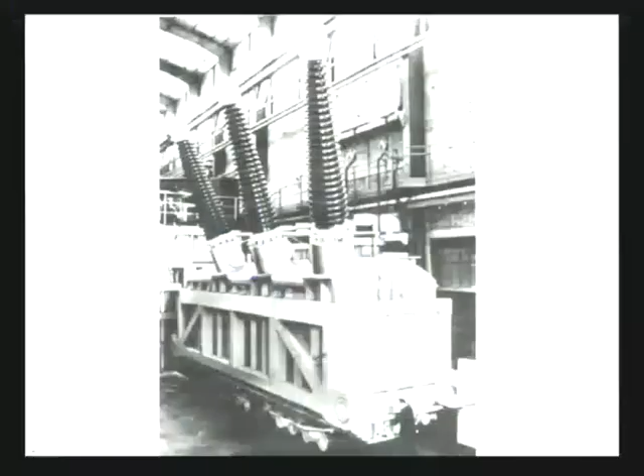One is shown in this diagram. From outside, it looks like a box or a tank fitted with a large number of accessories. In this lecture, we will see how the main parts of the transformer are constructed, their purpose, as well as the construction and purpose of these accessories.

So if we look at a cutout view of a transformer, we find that inside the tank, we find the core of the transformer, the windings, the terminals, and there is an overhead conservator like this.

The essential part of the transformer consists of a core with windings on the limbs. In the last lecture, we have seen that a three-phase transformer built as a single unit can be made up of three limbs. The return limb for the flux is not necessary, since the sum of the fluxes is zero. However, this three limb construction does offer a slight imbalance to the flux path.

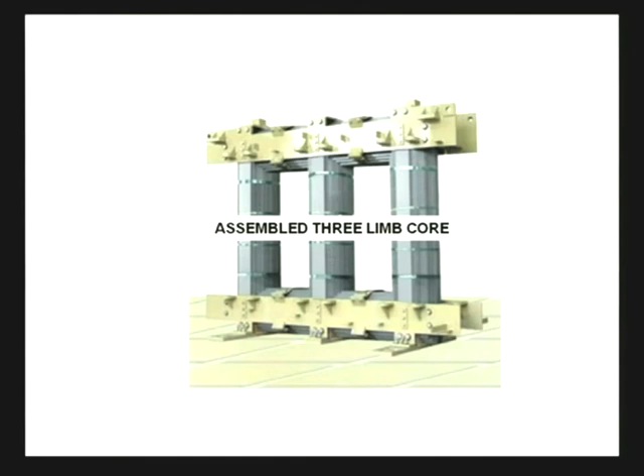So, here is a look at the assembled three limb core. There are several parts to it. These vertical parts are called the core, the horizontal one is called the yoke. As in the case of a single phase transformer, these are not solid iron bars. However, they are made up of thin steel laminations. The purpose of the core is similar to that of a single phase transformer, that is, to provide a low reluctance path for the flux as well as to support the winding and provide mechanical strength.

Since the flux flows along this direction, the transformer cores are laminated in this way. These cores are made up of long strips of thin steel plate, the material being either hot rolled or cold rolled grain oriented steel. For large transformers, it is usually cold rolled.

Since these are made up of steel laminations, it is necessary to bolt them down with clamps. These are the clamping pieces of the core.

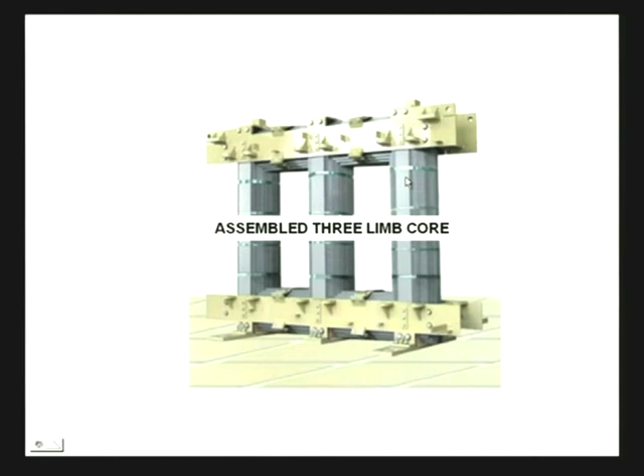If I look at a top view of one of the cores along with the winding, it will look somewhat like this. This part is the actual core cross section, on which there is an insulating bobbin cylinder, made up of pressboard or SRBP cylinder. On the cylinder, first the LV winding will be placed, then there will be a gap between the LV winding and the HV winding. There will be a second cylinder on which the HV winding will be placed, and there will be a gap between HV and LV winding through which cooling fluid may be circulated.

One interesting thing about the core structure is that it is not square. The reason is simple: in order to support a certain amount of voltage and not to exceed a given flux density, the core cross section must have some minimum area, and it is well known that for a given area, a circle has the minimum circumference.

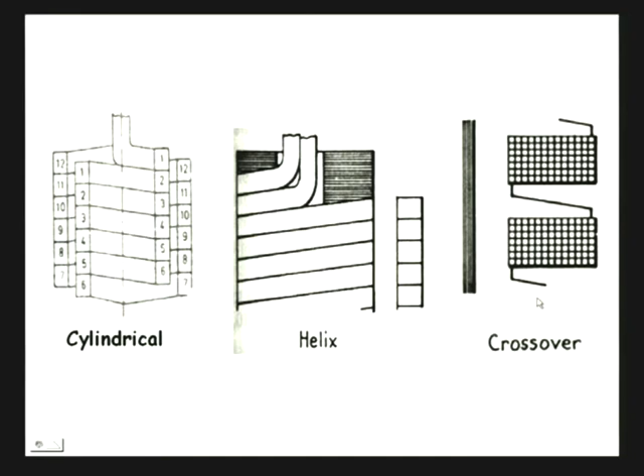This figure shows some of the common winding configurations. The first one is cylindrical, the second is called the helix, and the third is called the crossover. These are normally used for low voltage winding, while the crossover is used for high voltage winding with many turns.

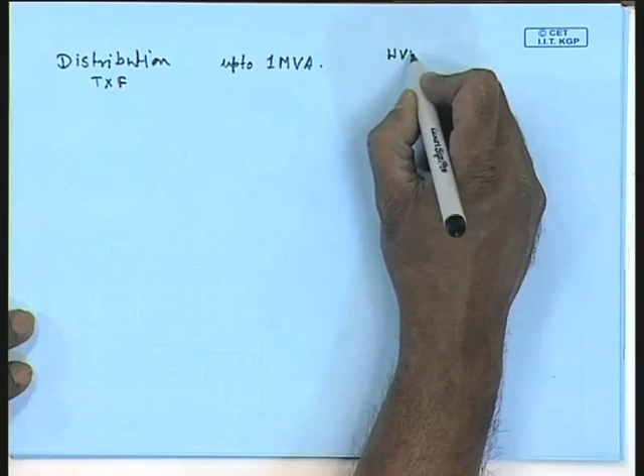Now, depending on the application, MVA rating and KVA rating of the transformer in question, different windings are used. For example, if it is a distribution transformer of MVA rating up to 1 MVA, the HV voltage rating is 11 kV to 33 kV. The HV winding will normally be either crossover or multi-layer helix.

Similarly, the LV winding for a distribution transformer will usually be rated at 440 volts. The choice of winding for this is helix, which is shown here. This is on the lower spectrum.

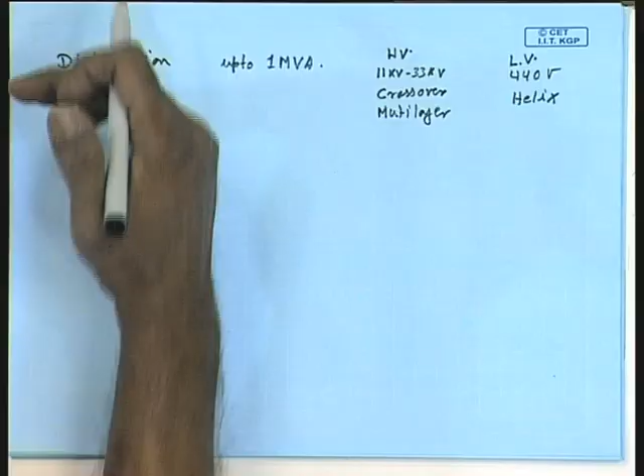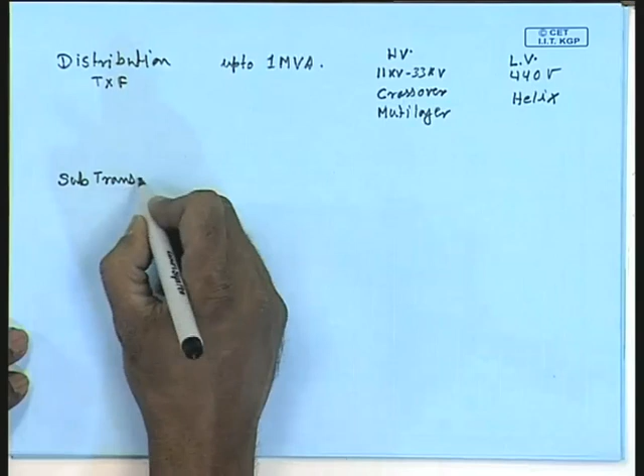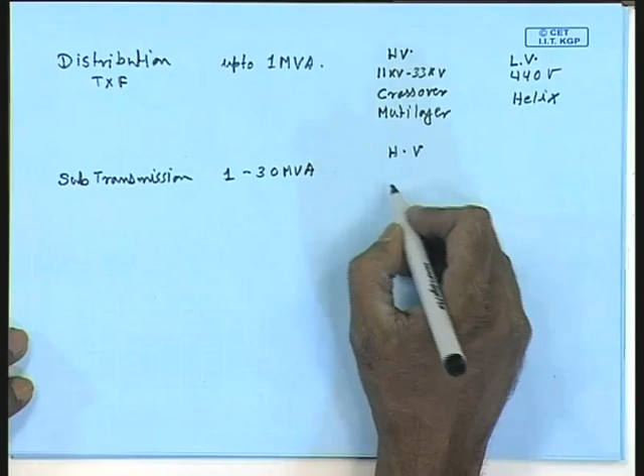Let us see something at the medium spectrum, which is the subtransmission level. This is, let us say, from 1 to 30 MVA. The HV voltage will be in the range of 33 to 66 kV. The preferred HV winding type for this is disc. The LV voltage for this type of transformer will usually be 11 kV, and for this LV winding usually disc or helix winding will be used.

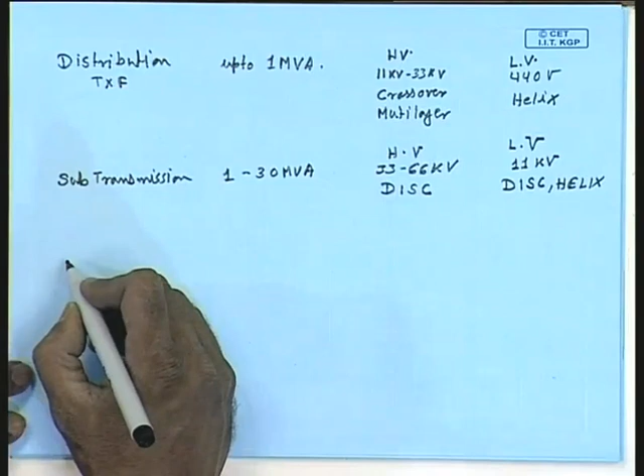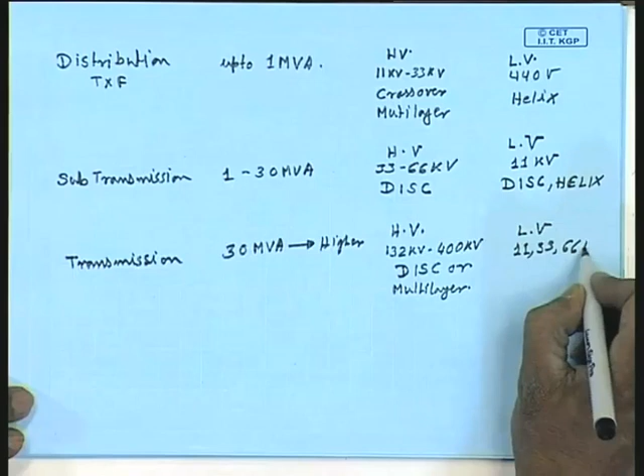Going further higher up in the MVA rating, transmission transformers will be 30 MVA and upwards. The HV voltage will be in the range of 132 kV to 400 kV. The preferred choice is disc or multi-layer. The LV voltage can be 11 kV, 33 kV or 66 kV, using disc or disc helix, multi-layer helix, disc, or disc helix windings.

Coming to generator transformers, this is also 30 MVA or upwards. The HV side is again 132 kV to 400 kV, and the choice is disc or multi-layer. The LV voltage, which is the voltage generated by the generator, will be in the range of 11 to 22 kV, and the choice of winding is disc helix.

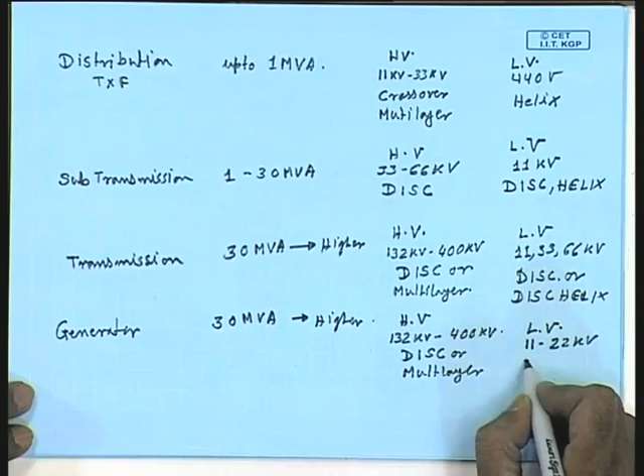So this is a rule of thumb, but depending on the special application, a particular type of winding is chosen.

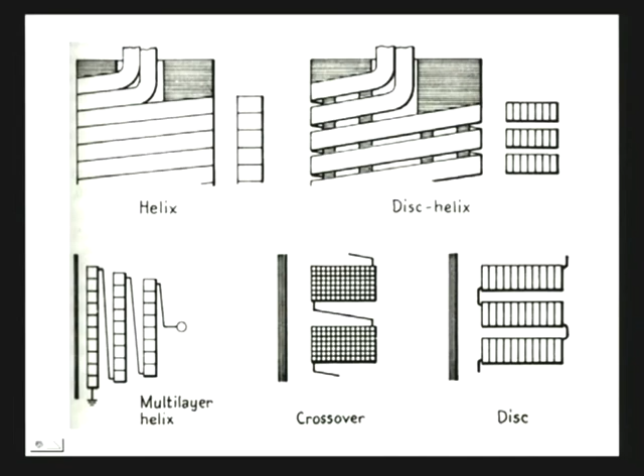This is necessary so that the cooling medium, that is the cooling oil, can flow in an uninterrupted manner, carrying the heat generated by the I squared R loss in the windings to the outside cooling medium.

Another interesting feature of a 3-phase transformer, which is normally not found on single phase transformers, is the arrangement of tapping.

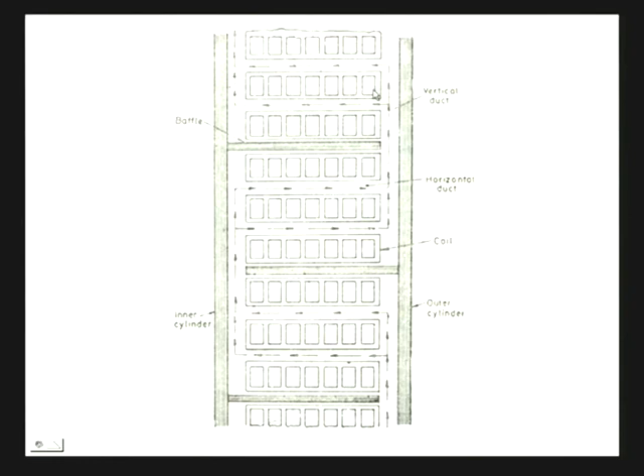We have mentioned in one of these slides that it is necessary to circulate cooling fluid through the windings and the core of the transformer in order to prevent the temperature of the transformer rising to a very high level.

Now there are different methods of cooling. For small dry type transformers, it is usually not necessary to use any separate cooling medium. The transformer is left outside, and the ambient air is sufficient to cool the transformer. This is called air natural cooling, or AN.

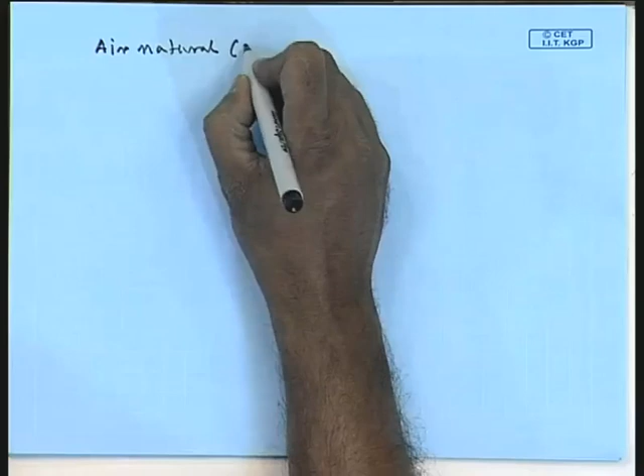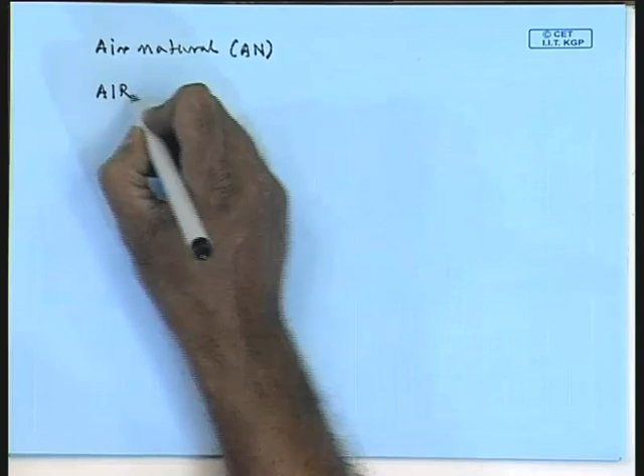On a slightly higher rated transformer, natural air circulation may not be sufficient to prevent temperature rise, in which case the transformer may be cooled using a fan. This is called air blast cooling. Except for very special applications where using a cooling medium is hazardous, these are used only for small rated transformers.

The reason for using oil is that it is a better conductor of heat than air, and it has a higher coefficient of volume expansion with temperature. Therefore, sufficient circulation is easily obtained on account of the natural thermal head that occurs in the transformer because of heat produced by different mechanisms of loss such as core loss and copper loss. So the natural cooling by oil works this way.

As the oil heats up, it becomes lighter, moves upward, and comes in contact with the transformer tank wall, through which this heat is dissipated to the ambient. This is called oil natural cooling.

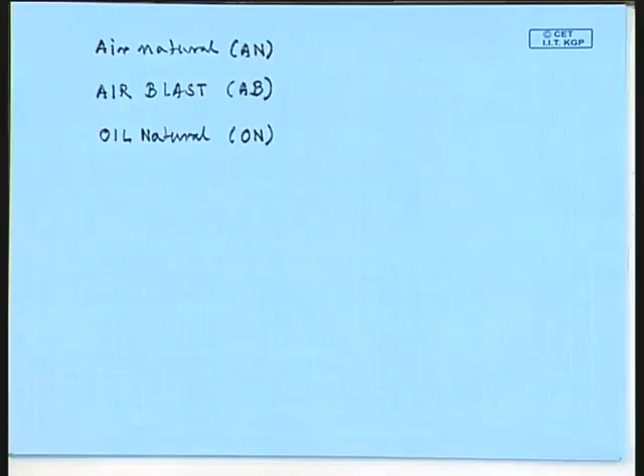Now, for smaller rated transformers, a simple transformer tank is sufficient to provide this cooling.

However, for larger transformers, the surface area provided by the tank alone is not sufficient, and therefore the tank's area is usually supplemented. Either the tank surface is corrugated to increase its surface area, or more commonly, circular or elliptical tubes are placed all around the transformer tank in order to increase the cooling area.

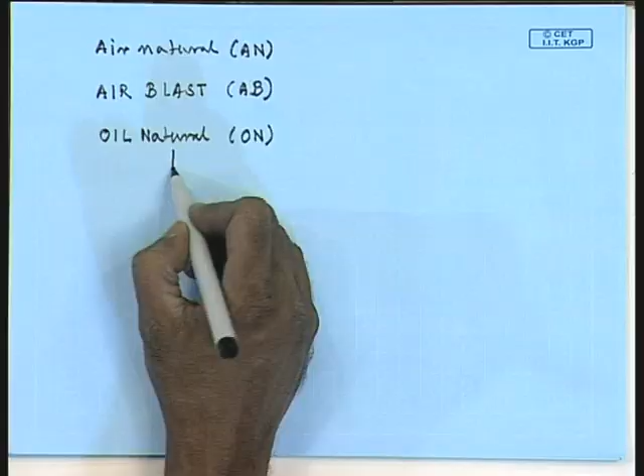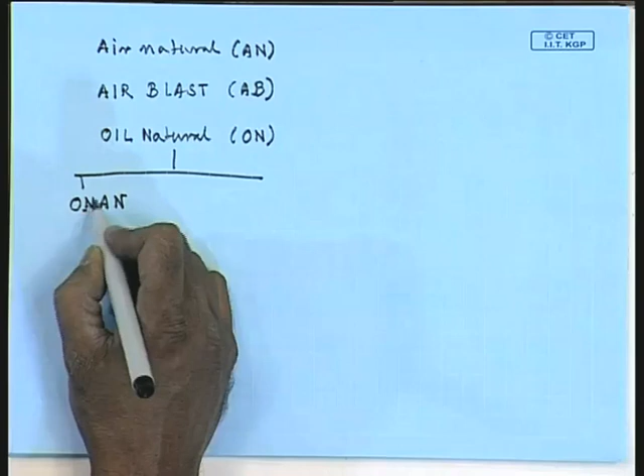There are several categories. This is called oil natural, air natural, because neither the oil nor the air is forced through any pump or any other device.

However, for larger transformers, natural cooling by air is not sufficient, in which case it becomes necessary to blow air to cool the heated oil.

For this, normally the hot transformer oil is carried to an external heat exchanger through a piping arrangement, and in the heat exchanger, heat is transferred from the oil to surrounding air, usually cooled using a fan. This method is called oil natural, air forced.

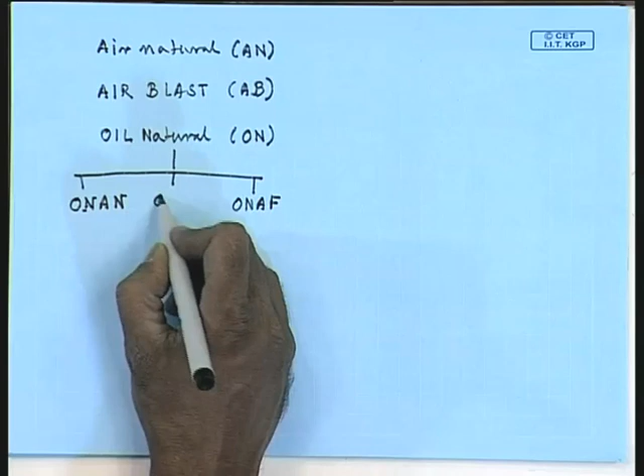This heat exchanger can also be cooled by forcing water to circulate around the oil carrying pipes, in which case it is called oil natural, water forced. This is used normally in hydroelectric generating stations for the generator transformer, because a large quantity of water at a sufficient head is available, and water is a better medium of cooling than air.

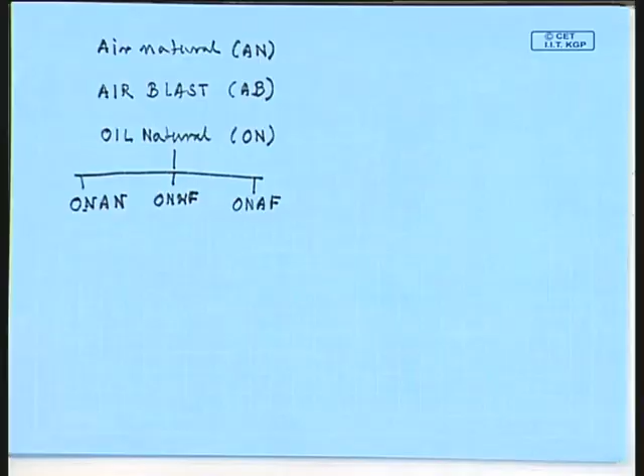For even larger transformers, the normal thermal head of the transformer is not sufficient to provide enough cooling. Therefore, the oil is circulated through the transformer using an oil pump. The rest can be similar to oil natural, air forced. This oil pump circulates the cooling oil through the transformer at a given flow rate in order to remove the heat generated from the transformer faster.

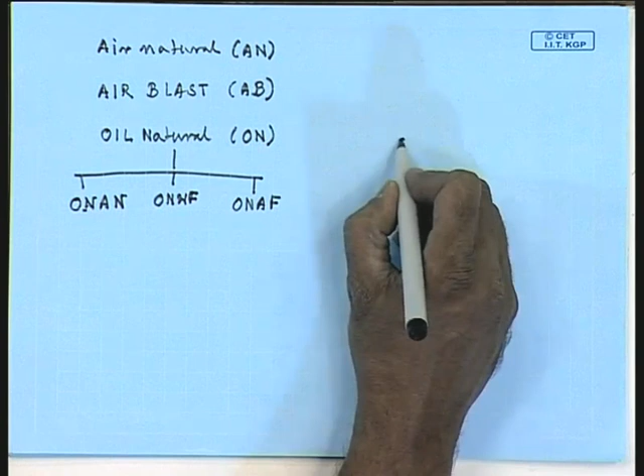So this is called the oil forced cooling method. It is usually used with a heat exchanger which is cooled by a fan, so the complete scheme is known as oil forced, air forced. Such a scheme is shown in this diagram.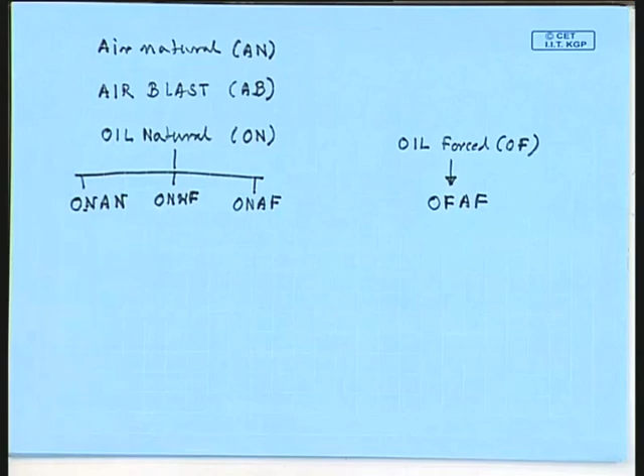It is interesting to note that this scheme can operate in variable mode. For example, the oil pump and the fan need not be on all the time. If the transformer is lightly loaded and dissipating less heat, then both the oil pump and the fan may be turned off, and the scheme can work in an oil natural, air natural cooling method.

If the load increases to some extent, the fan may be turned on first, so it will work as an oil natural, air forced method. It is only at near rated load or at rated load that it will work as an oil forced, air forced cooling method. This way, the power consumption for cooling comes down and the overall efficiency of the transformer increases.

The next important constructional feature of a transformer is its bushings. These bushings are meant for making connection to the transformer from overhead lines. It has to be ensured that the transformer tank is normally earthed, so when making a high voltage connection through the tank to the transformer winding, it has to be ensured that there is no flashing, short circuit, or degradation of insulation between the high voltage terminal and the earthed transformer tank. This is done through a special bushing.

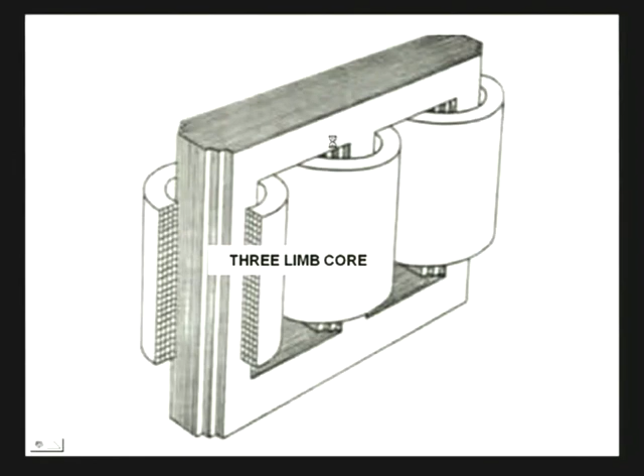The transformers are also to be provided with sufficient protections. The electrical protections are normally provided by relays. Here is one arrangement that provides protection against transformer overcurrent or short circuit. This is provided by what is called the Buchholz relay.

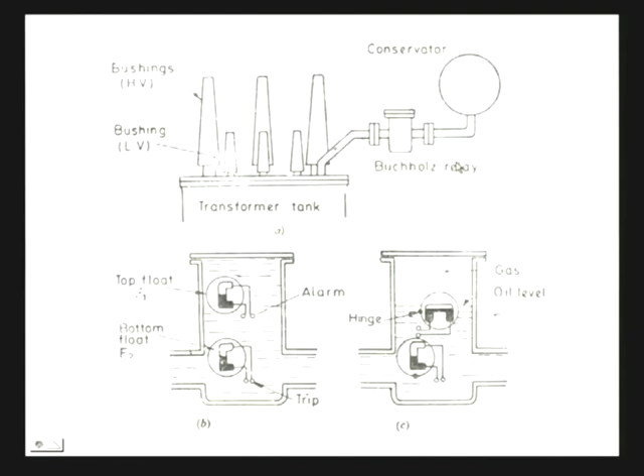The conservator provides a space for expansion of the oil. As the transformer heats up, the oil expands and flows through the tube to the conservator. Now, this conservator, although it is not shown here, is connected to the external atmosphere through what is called a breather. So, this is the conservator.

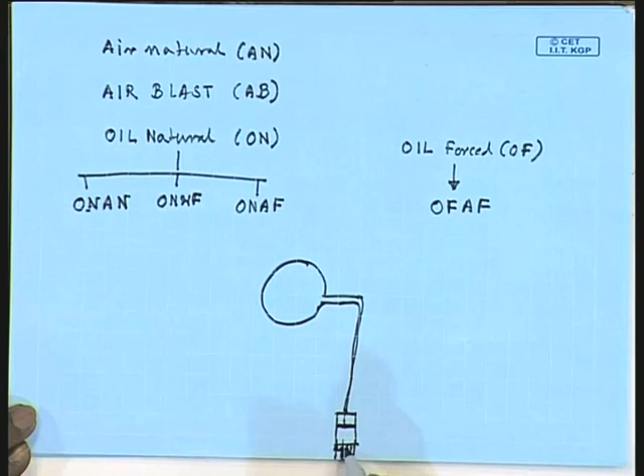The conservator will normally have a pipe extending down, this is called the breather, and at the breather end there will be a cylinder like this. This cylinder will contain silica gel, so that the air that comes in or out of the transformer is always passed through this silica gel, which absorbs moisture. So, the contamination of the transformer oil due to atmospheric moisture is minimized.

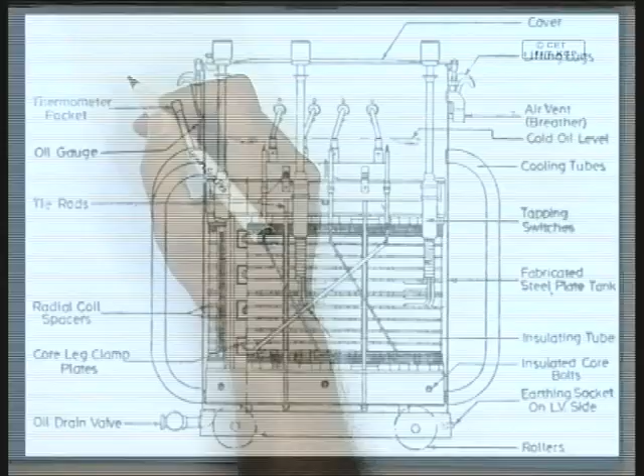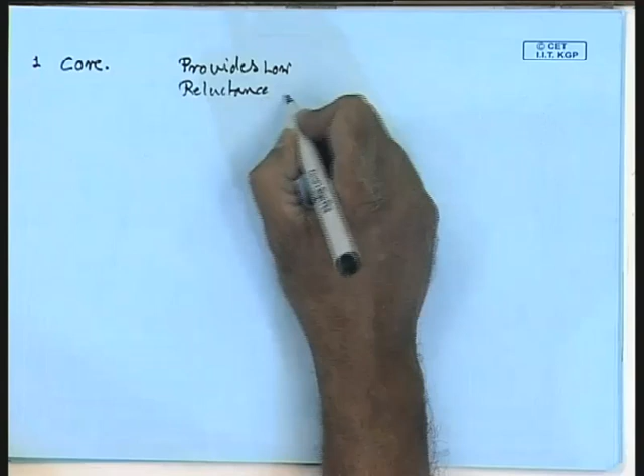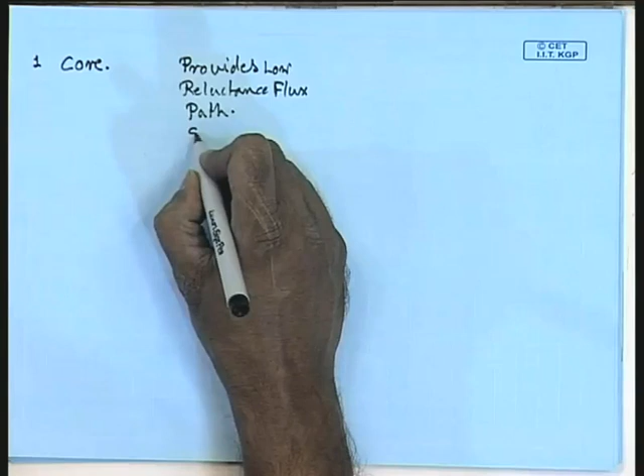So, this more or less summarizes the main constructional features of a 3-phase transformer, the main parts of which we can summarize as follows. The main parts of the transformer are: one is the core. The purpose of this core is to provide a low reluctance flux path, and also provides support for the winding. So, these are the purpose, this is the structural element.

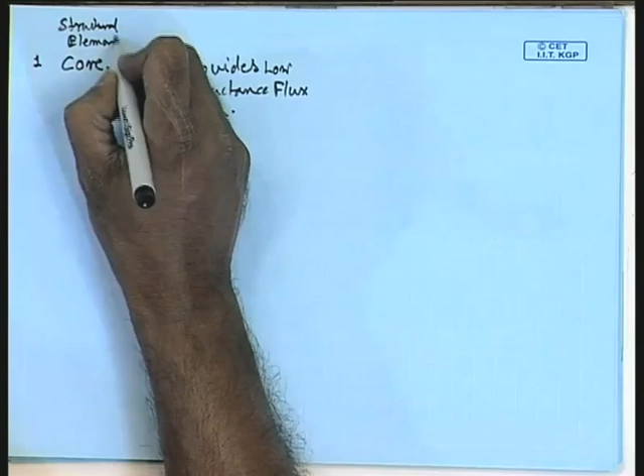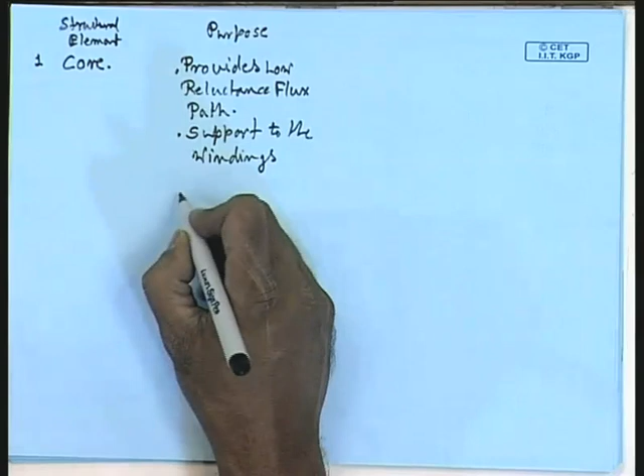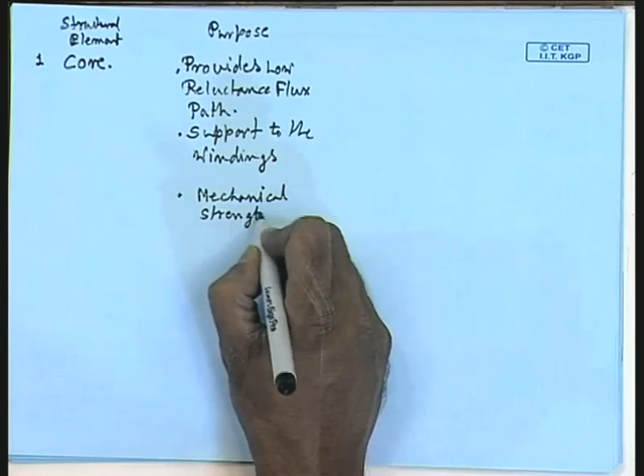This is the purpose. This also provides support to the winding, as well as provides structural or mechanical strength. It should be realized that the transformer windings are subjected to substantial mechanical forces, particularly during abnormal operating conditions such as faults, and they should be designed to withstand such mechanical forces.

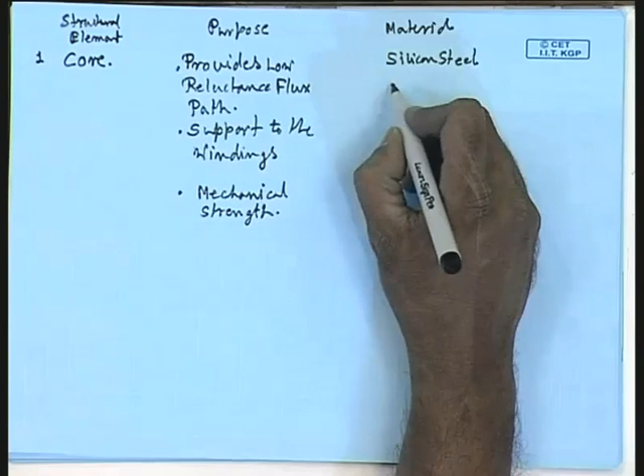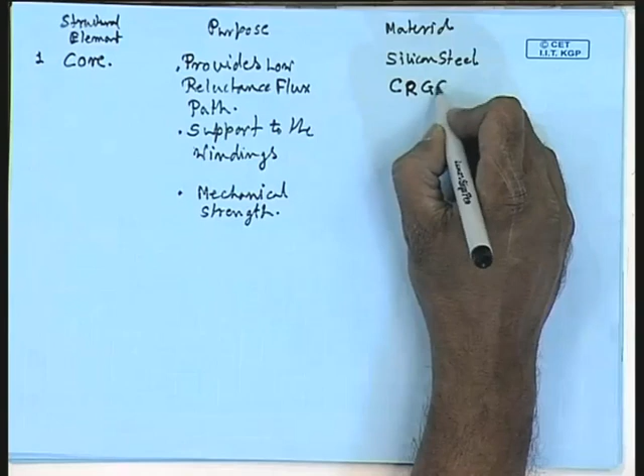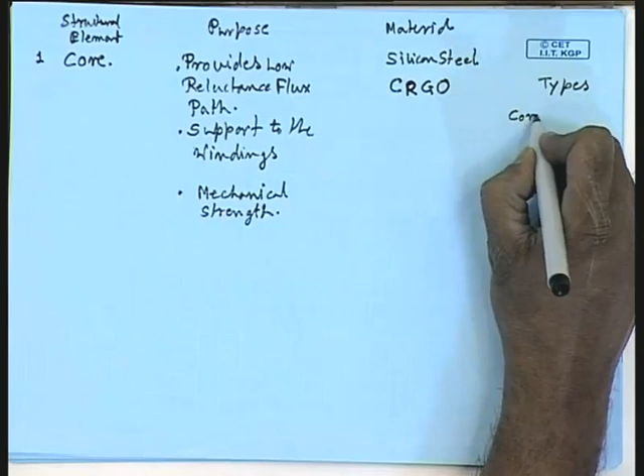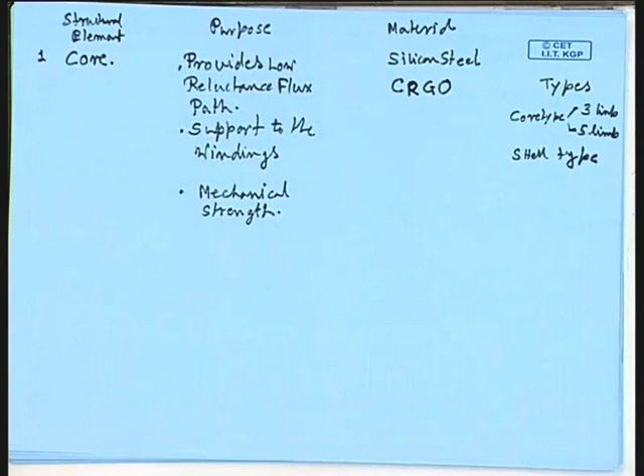The material for the core is silicon steel, normally cold rolled grain oriented, CRGO. It is oriented in the direction in which the flux is expected to flow, and there are different types. For example, it can be core type, which can again be either 3 limb or 5 limb, or it can be shell type. So, this is the types of cores.

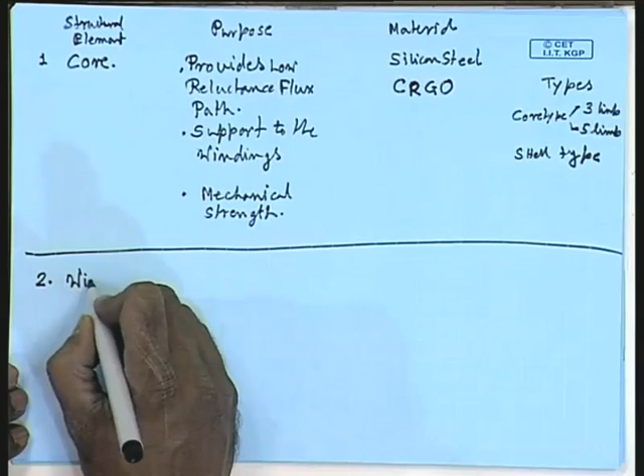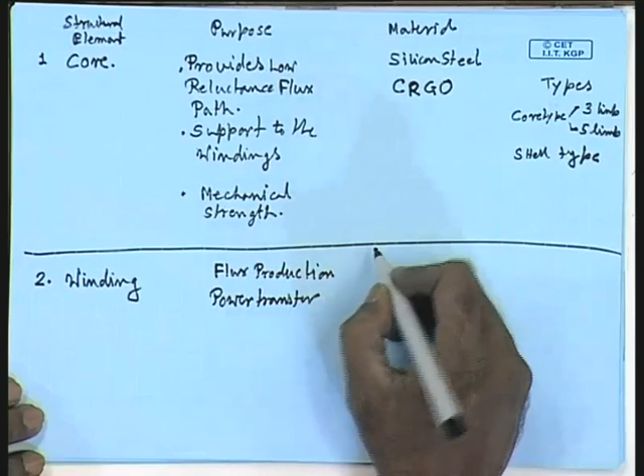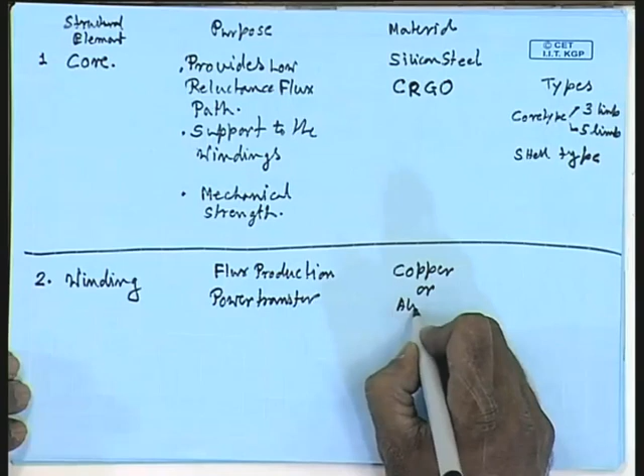The next important feature is the winding. Important construction feature is winding. The purpose of this is flux production and power transfer between input and output. The material used are either solid or stranded copper or aluminum conductors, maybe solid, stranded conductors or strips. There are different types of winding.

HV winding can be of crossover, disc, multilayer type. LV winding can be of helix, disc, or disc helix type.

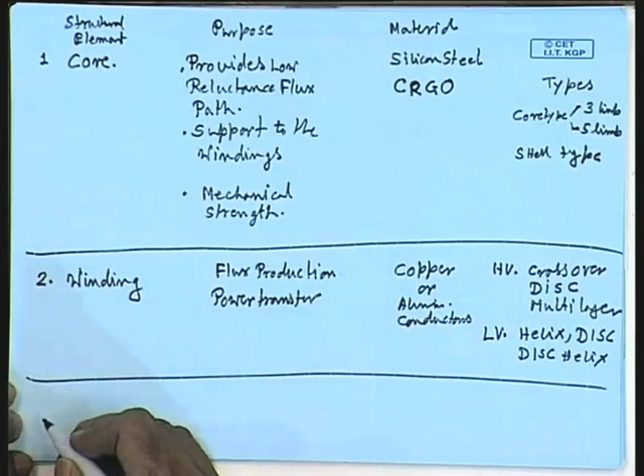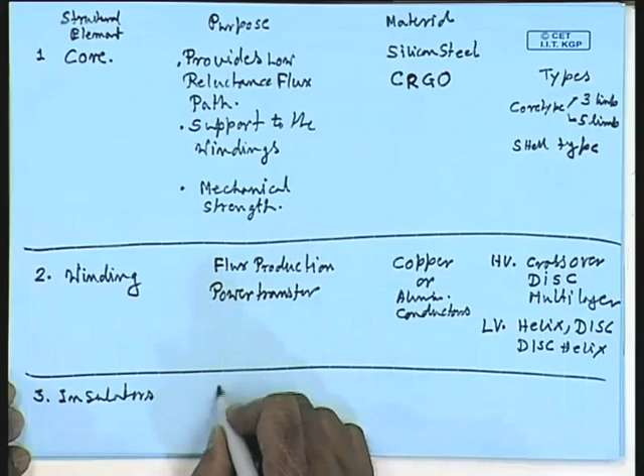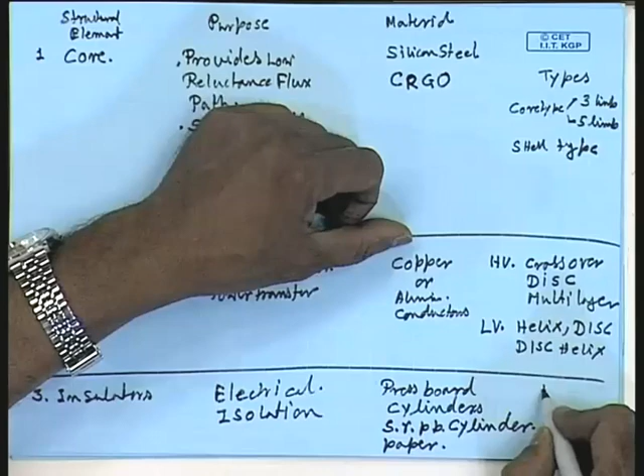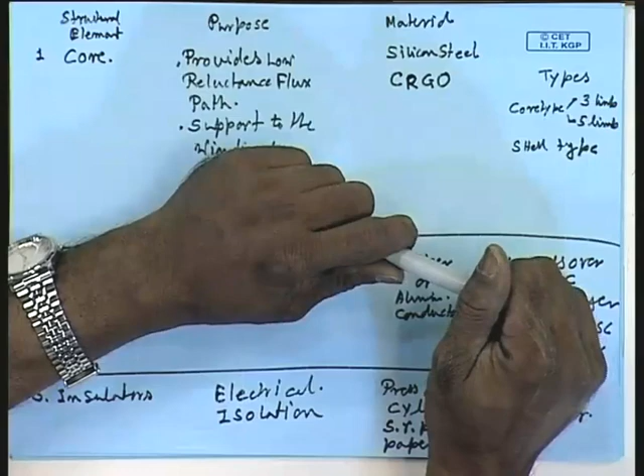Third important constructional element are the insulators. They provide electrical isolation between different parts. The materials used are pressboard cylinders, SRPB cylinders - SRPB stands for synthetic resin paper - and transformer oil. There are two types of insulators: one is called the major, which is between different windings, core and winding, and between phases; and minor, which is between different parts of the same winding; and the third type is the oil barrier, which is the insulation relative to the tank.

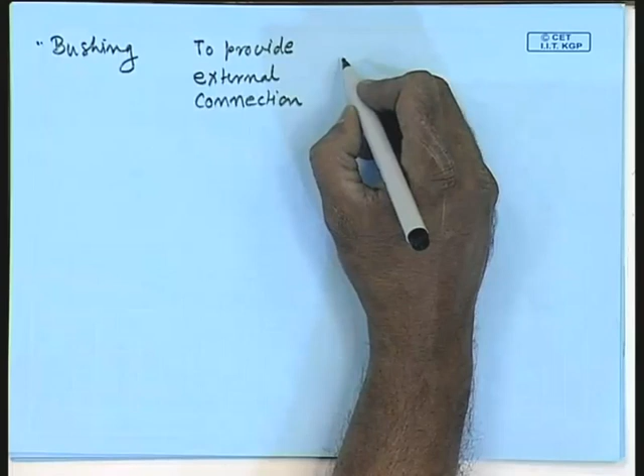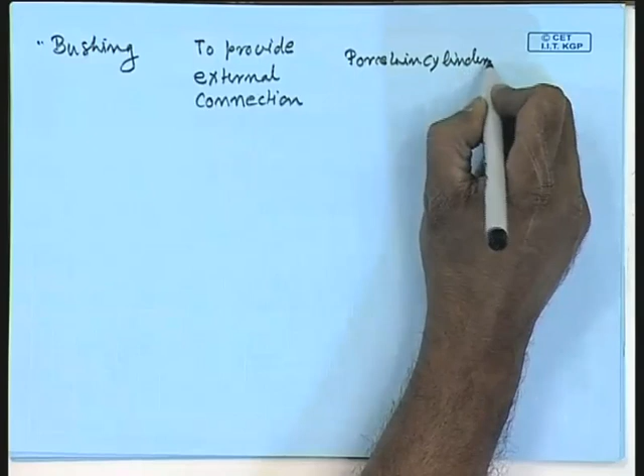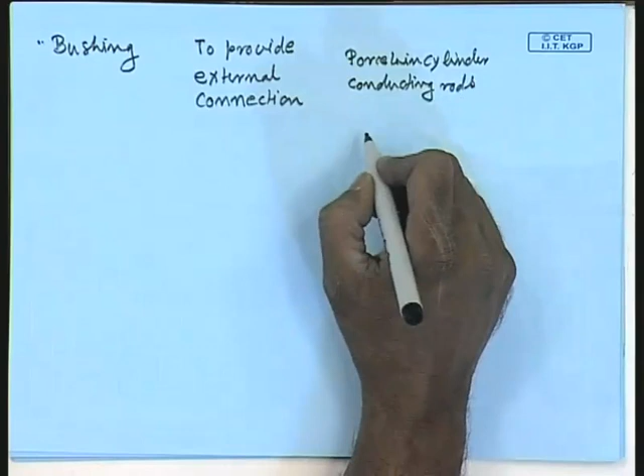The next important structural element is the bushing. The purpose is to provide external electrical connection. The materials are porcelain cylinders, conducting rods, insulating spacers, oil. These are two types: oil filled type and capacitor type.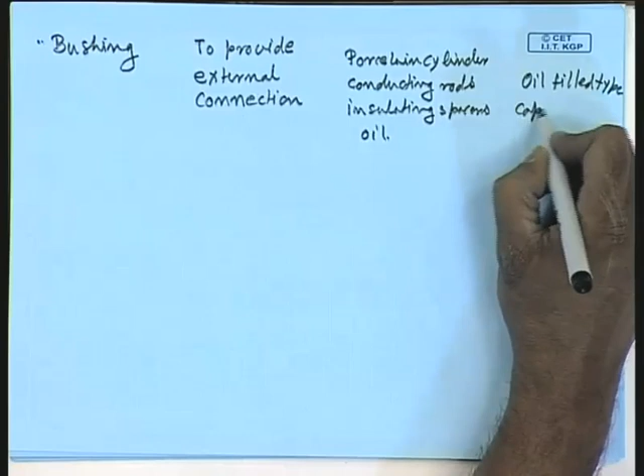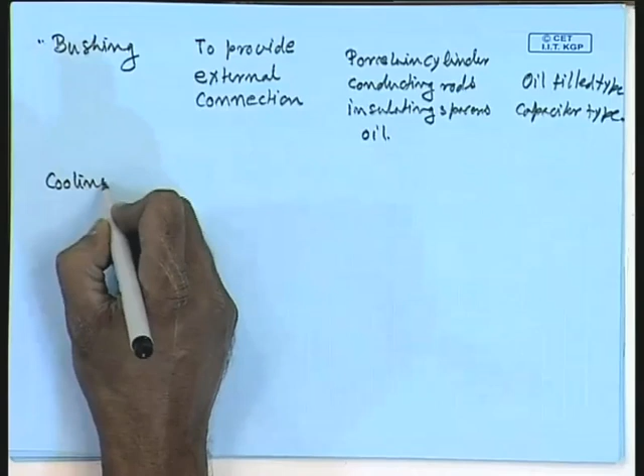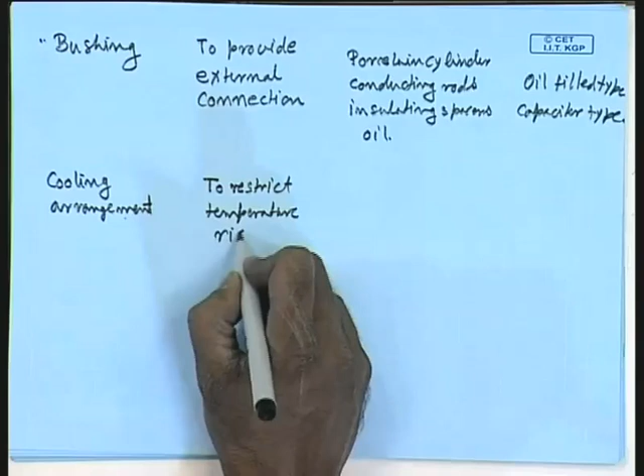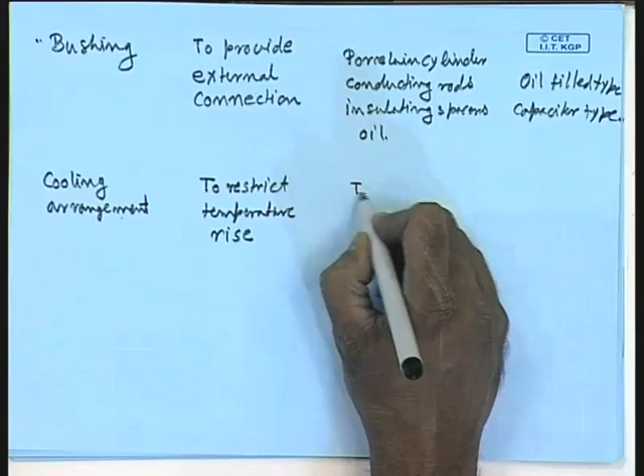Then you have cooling arrangement, to restrict temperature rise. The medium of cooling, or the material and components required for cooling, are tank, oil, pipes, fins, heat exchangers, fans, oil pumps. These are the components required for the cooling arrangement, and you have different types of cooling.

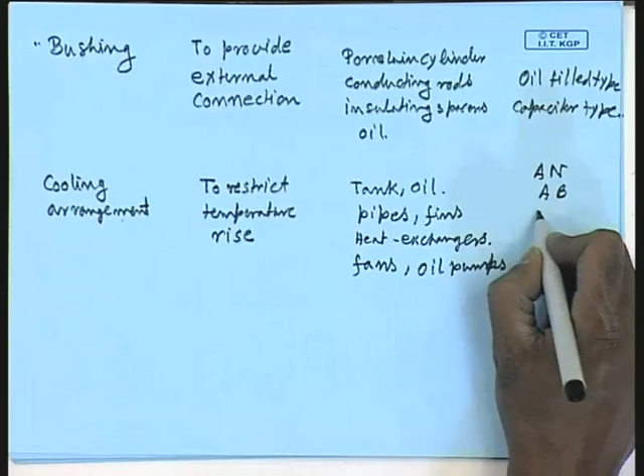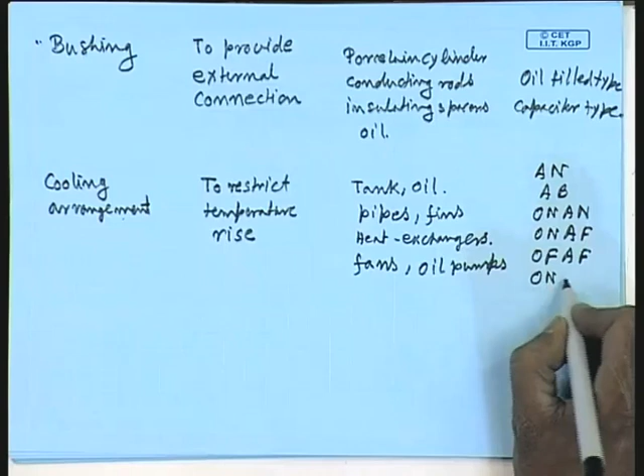For example, air natural, air blast, oil natural air natural, oil natural air forced, oil forced air forced, oil natural water forced, oil forced water forced. These are different types of cooling. They are used with increasing rating of the transformer. This is for the lowest rating, this is for the highest rating transformer.

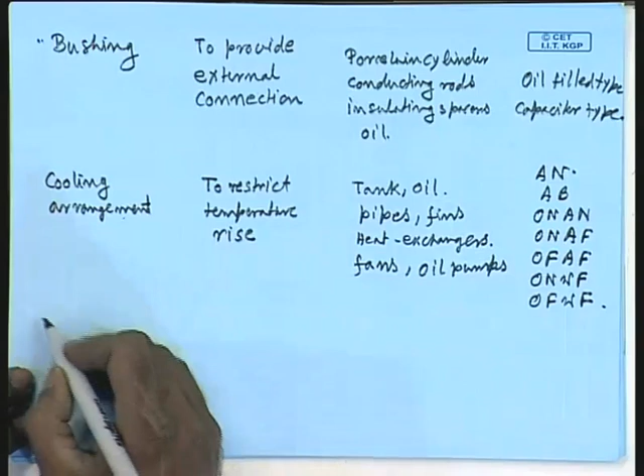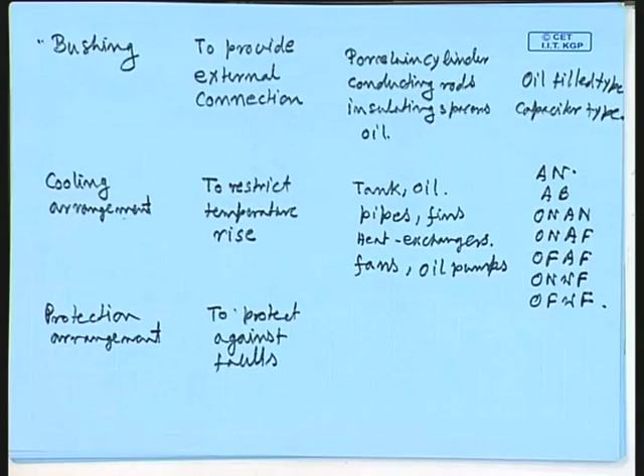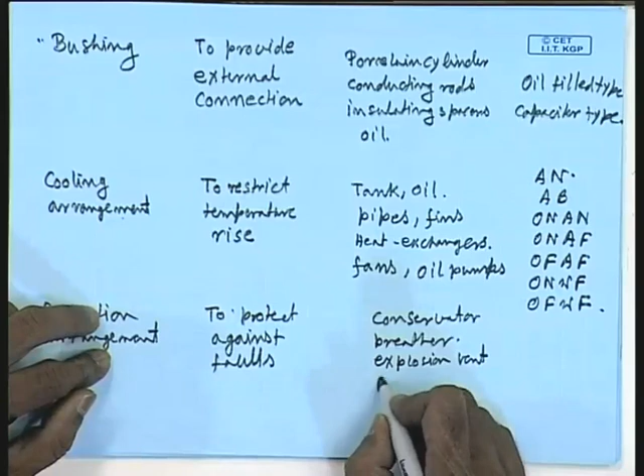And then lastly the tap changer. So, this is to adjust or control voltage. So, you have to have additional turns, current limiting resistance RA, RB, diverter switch. This again can be of two types, one is on-load and off-load tap changers.

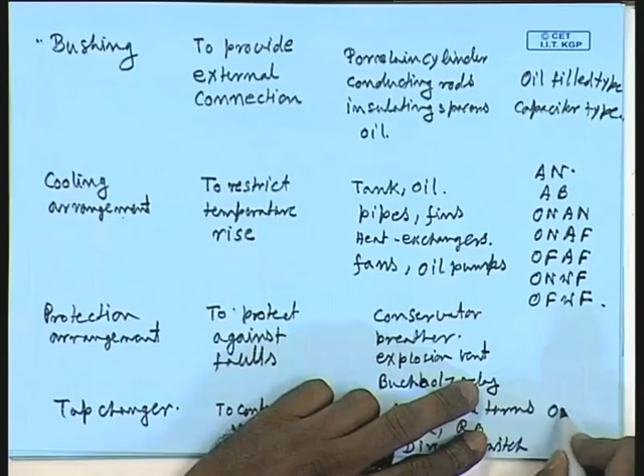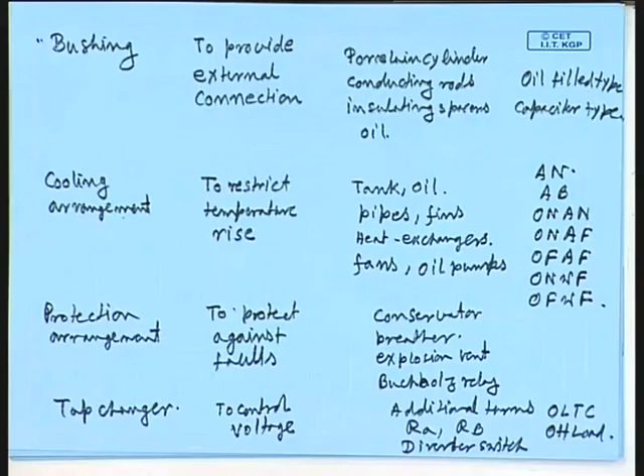So, this in nutshell summarizes the basic constructional features and their purpose and types of 3-phase transformers. Thank you.